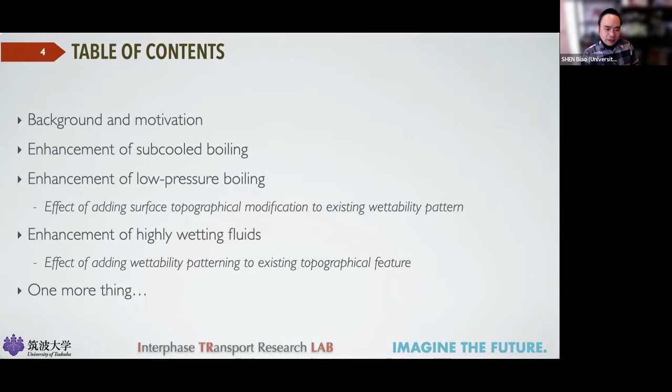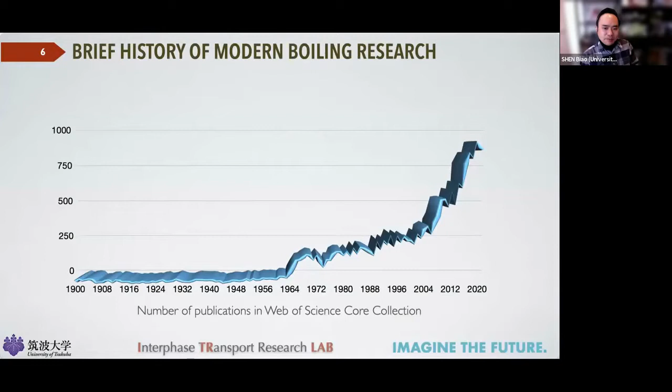So let's first go back in time. Here's a plot of the number of boiling related publications versus time in the Web of Science Core Collection.

In almost every textbook on heat transfer, the beginning of boiling heat transfer research is attributed to Nukiyama's description of the boiling curve in 1934.

Here I want to dig a little bit deeper. I don't know how many of you have actually read the original paper by Nukiyama, which is actually a terrific read. It was written in a very, very old-fashioned style, and for better or for worse, not so many people write papers like that anymore.

After reading the paper, I learned a couple of things. First, Nukiyama didn't measure the whole boiling curve, because he couldn't control the surface temperature, the part about transition boiling was actually missing from his data.

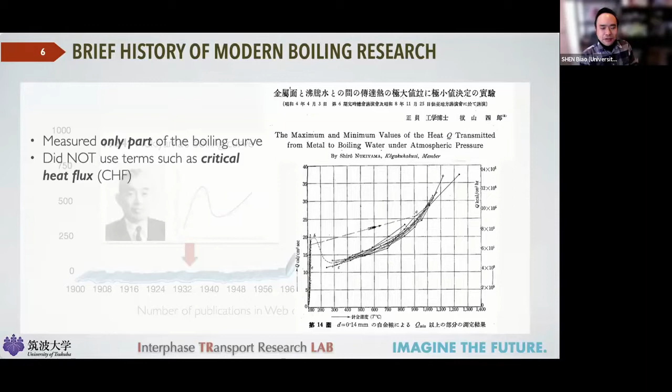Second, he never used the term critical heat flux in his paper, which makes me wonder who actually coined the term critical heat flux. If you know the answer, please let me know.

Thirdly, he's very honest about the limitations of his experimental setup. A big chunk of the paper was actually devoted to uncertainty analysis.

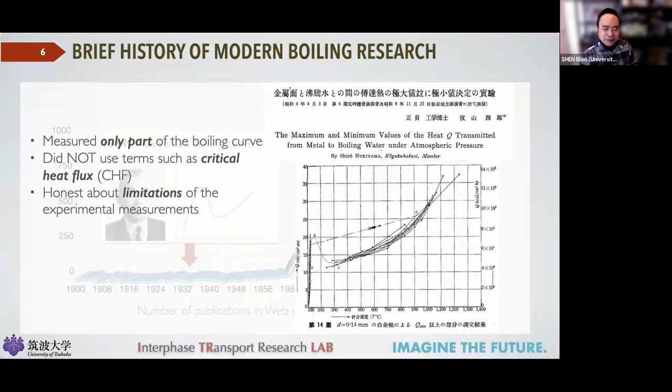And right out of the gate, he acknowledged the impossible task of theorizing boiling phenomena. He wrote, I quote, 'As the boiling phenomenon is so involved and complicated, the analysis of boiling heat transfer is almost an impossible problem.'

And finally, he cited only 5 papers. So I guess you know you're the pioneer of any field if your paper only contained 5 references.

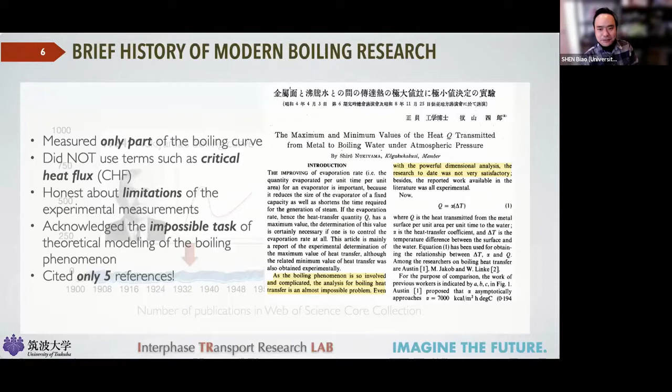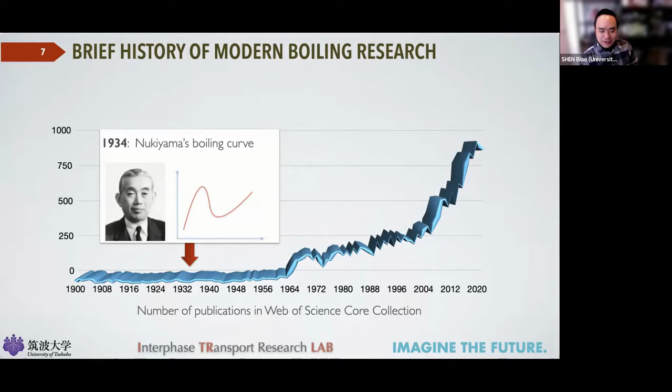So after the groundbreaking work by Nukiyama in the 1940s and 50s, nothing actually happened. That is, until another groundbreaking work came onto the stage, and that is Zuber's hydrodynamic interpretation of the boiling phenomenon. That really elevated boiling from an engineering curiosity to a serious scientific topic, putting boiling on the map, so to speak.

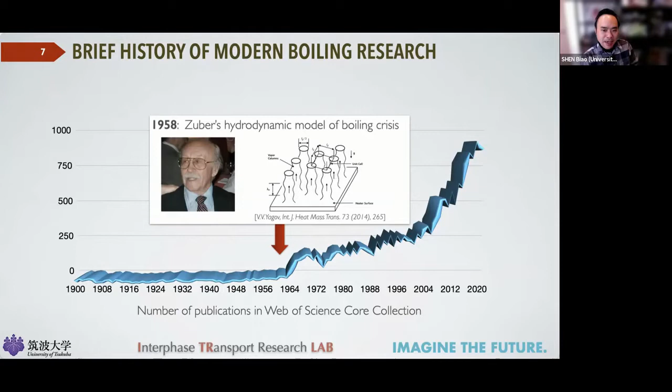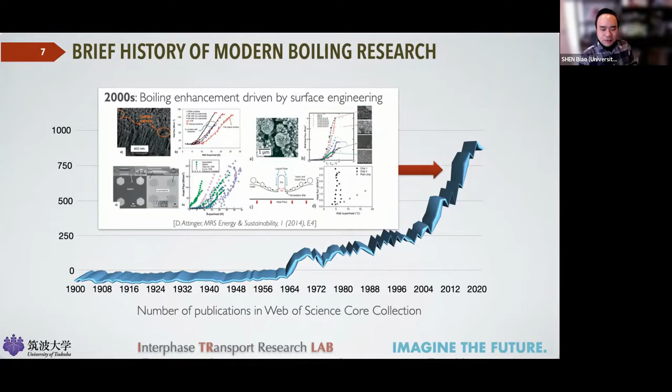And around the turn of the century, the world has seen another wave, or another golden age, for boiling research. This time it was not driven by any particular theoretical work, but by a sudden proliferation of all kinds of tools at our disposal to directly manipulate and control surface properties. There is now a global contest to see who can come up with a boiling surface that can have the highest CHF, lowest ONB, and can last forever. My work is pretty much part of that effort.

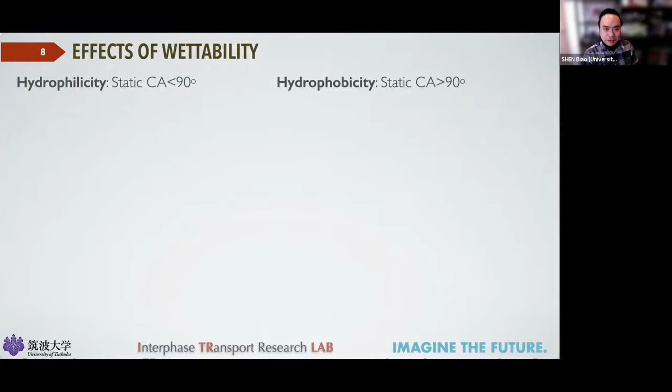Here, the surface is actually a titanium dioxide surface under ultraviolet irradiation. So the incoming photon can knock off an oxygen atom from the surface, thus creating a vacancy in the surface that can help the surface bond with water or hydrogen atoms in this case.

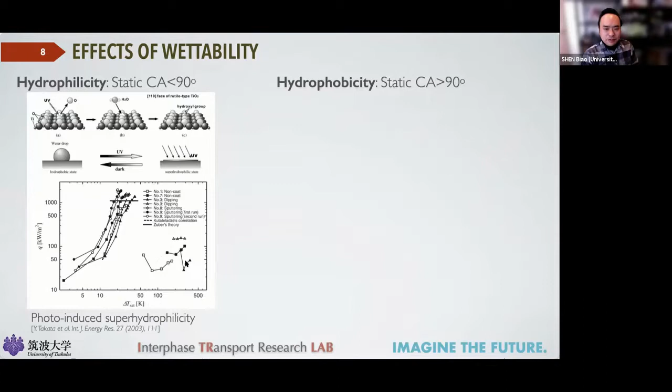So the surface has a very high CHF and also a minimum heat flux, MHF. And that means the surface works very well in the high heat flux region.

At the opposite end of the spectrum, you would have a hydrophobic surface. Here's an example - I think this is a copper surface electroplated with a very thin layer of suspended PTFE particles. The surface has a very high contact angle, maybe reaching 140 degrees, but it has some durability issues, though that's another story.

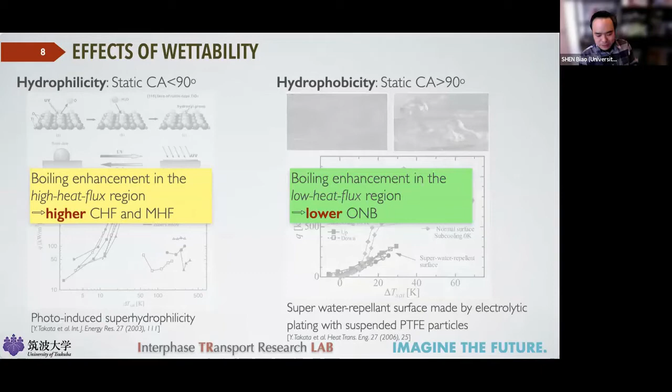The surface has a very low onset nucleate boiling, but once boiling started on such a surface, it soon turned into a very thin vapor layer, which makes the surface pretty much useless for any heat transfer application. But not all hope is lost when it comes to hydrophobic coating.

When combined with a hydrophilic substrate, it can work pretty well, and the end result is what we call a biphilic surface. It's a surface with an alternating pattern of hydrophobicity and hydrophilicity.

As you can see here, you can have heat transfer enhancement from ONB all the way to CHF. More interestingly, you can have very ordered bubble nucleation and growth on the surface. The bubbles tend to form on the hydrophobic part of the surface, but their expansion will be limited by the surrounding hydrophilic area.

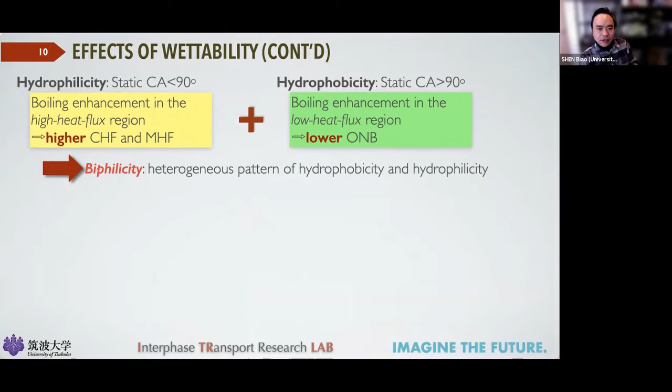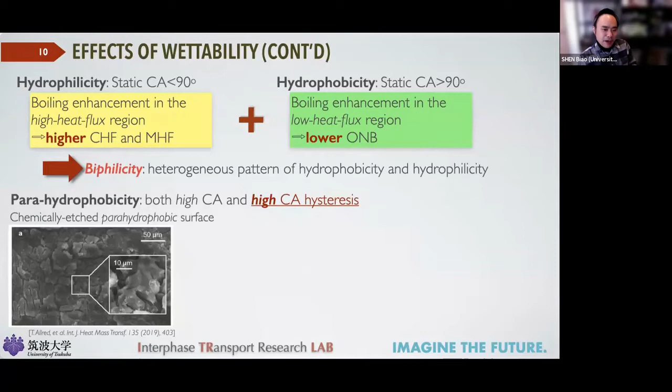It would be remiss on my part not to mention this new concept, parahydrophobicity, which entails both high contact angle and high contact angle hysteresis. Here's an example of a parahydrophobic surface, and it mimics a rose petal instead of a lotus leaf. Boiling on such a surface tends to have both low ONB and high CHF.

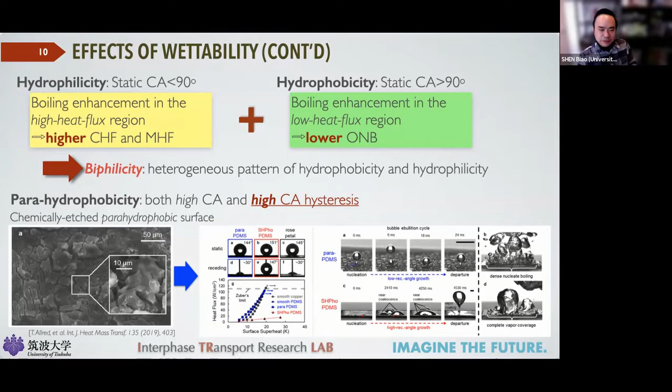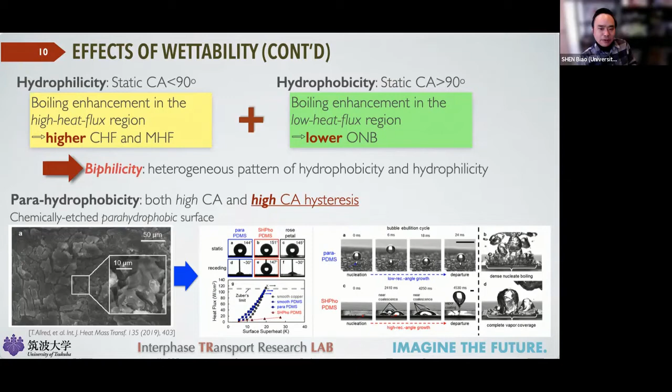If you pay attention to how bubbles grow on such a surface, as you can see here, the footprint of the bubble tends to be very small, meaning its expansion on the surface has been greatly hindered, which makes it work in a very similar way to a biphilic surface. So I guess the key here is trying to come up with ways to directly control contact line dynamics on the surface.

All right, let's start with the case of enhancement of subcooled boiling. This is the first project I did since joining the University of Tsukuba.

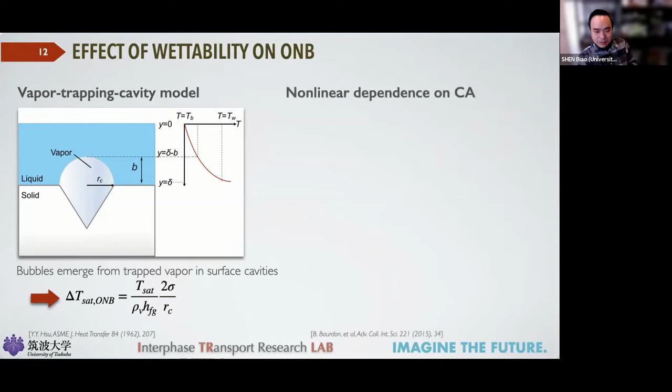And apparently that is not the case. We have direct experimental data showing a very strong nonlinear dependence of ONB superheat on surface contact angle. The surface used in this study is an ultra-smooth glass substrate and grafted and coated with self-assembled monolayers of different wettability.

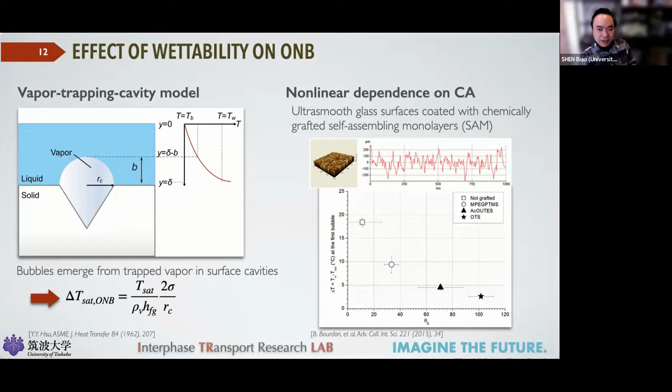So you can almost remove surface roughness as a parameter and focus on the surface contact angle. As you can see here, as the contact angle increases, you tend to have very low onset nucleate boiling superheat. But the question is, how low?

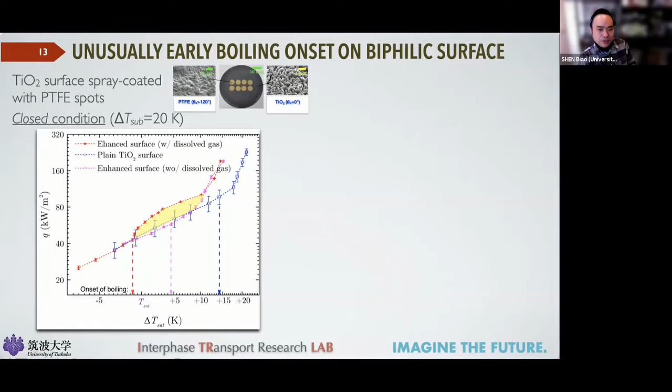And that is not the most interesting part. What is interesting about this research is that none of this behavior can occur with a homogeneous copper surface.

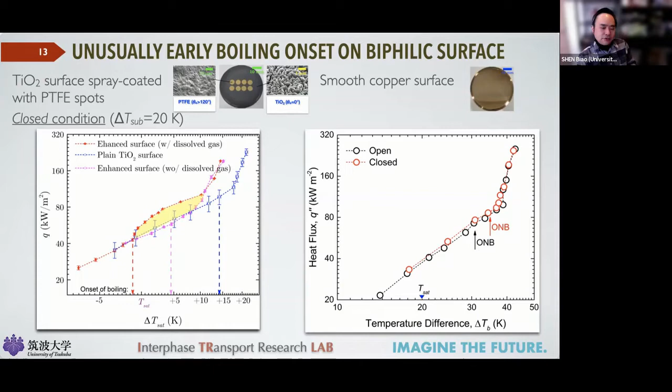As you can see here, with the same experimental procedure and setup, you don't see this kind of dramatic change in the boiling curve. And that means the hydrophobic part of the surface has this unusually strong affinity for vapor or gas.

We ran some diffuse interface simulation using a water-nitrogen system and observed pretty much the same behavior. That is, you tend to have bubble departure from the surface only if you also have a high concentration of dissolved gas in the liquid phase.

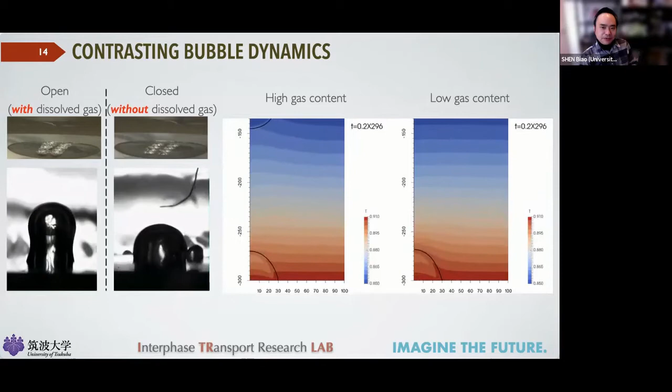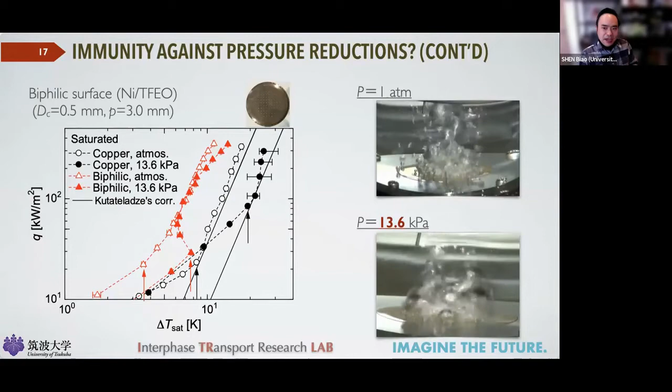Then we tried the same experiment with a copper surface, I think coated with nickel TFEO, maybe particles in this case. The results show a very dramatic difference. The boiling curve is almost immune to the pressure change. As you can see here, most of the nucleation sites remain active even under such a low pressure.

But like any good story where there's always a plot twist at the end, the pressure resistance of the biphilic boiling surface, I can only say, was too good to be true. It was later found that when the pressure is further reduced, a sudden transition to this kind of intermittent boiling mode also occurred on the biphilic surface. So we have to modify our conclusion a little bit, to reflect that the transition to intermittent boiling was only effectively delayed, but not eliminated, on the biphilic surface.

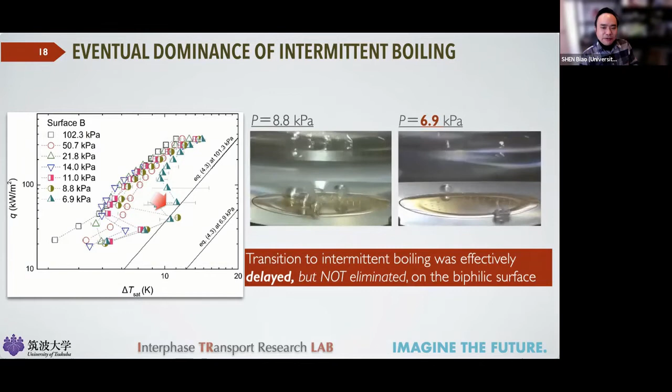To solve this problem, we need to figure out exactly how that transition happened. And that is exactly what we did: we tried to gather more data on bubble dynamics from a single hydrophobic spot.

The first thing we noticed is that at high pressure, you can always have vapor residual left on the surface after bubble departure. It's easy to imagine that for that to happen, the contact line has to be affixed to the surface in the final moments leading up to bubble departure, so the rupture of the bubble interface happens in the middle of the bubble instead of at the bottom.

This remaining vapor on the surface is critical, because from these residual vapors you can start the next cycle of bubble growth without any delay, and that's very good for heat transfer applications. By comparison, at low pressure, the amount of vapor residuals tends to be significantly less, and from time to time you have these clean bubble departures from the surface, which didn't happen at high pressures.

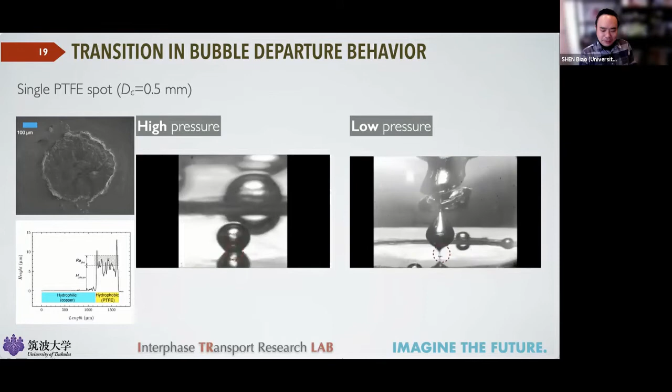Without vapor residuals on the surface, in order to start the next ebullition cycle, you have to wait maybe seconds, like in this case. That's how the intermittent boiling mode starts to take over even on the biphilic surface. Now we have these experimental observations, the next step is to figure out exactly what happened.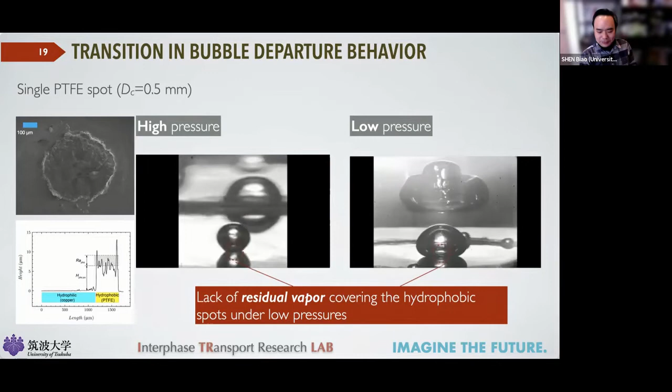As I mentioned before, the existence of bubble residue on the surface has a lot to do with how the contact line moves in the final moments leading up to bubble departure. In the case of low pressure, our hypothesis is that the contact line somehow depinned from its original position on the surface, and that causes this disappearance of bubble residue from the surface.

It turns out the way the contact line moves on the surface is not a trivial matter. It has a subtle but significant impact on bubble departure itself.

On the left, you have experimental data on bubble departure diameter as a function of pressure. Let's consider a scenario where the contact line remains fixed, or pinned, on the surface. The bubble departure will depend on the force balance between the buoyancy force and the resisting surface tension force. Here is a simple prediction coming out of that model, and as you can see, the prediction is almost independent of pressure change.

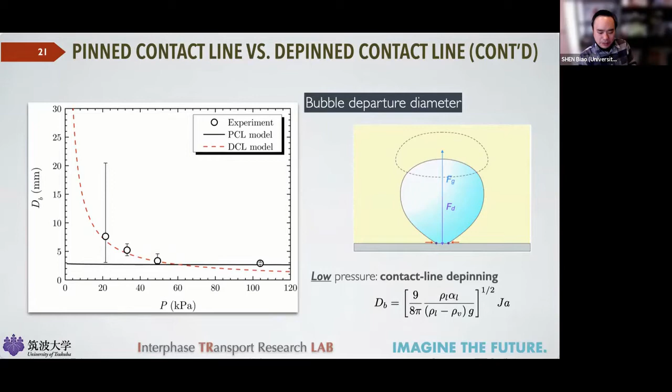Let's consider a second scenario where the contact line is allowed to move in the moments leading up to bubble departure, meaning the bubble base is always shrinking. In that case, the bubble departure depends on the force balance between the buoyancy force and the viscous drag force, giving a very different prediction for bubble departure size, strongly dependent on pressure. The transition between the pinned contact line model and the depinned contact line model captures the transition of bubble departure diameter we actually measured in our experiment.

That begs another pesky question: what actually triggers bubble motion? What actually triggers contact line motion on the surface? The answer is surprisingly simple and straightforward. It has to do with how fast the bubble expands on the surface.

So we ran some simulations to compare the cases with fast bubble growth and slow bubble growth. As you can see, in the case of faster bubble growth, the contact line is not responding to the changing surface wettability. But in the case of slow bubble expansion, you have a pinned contact line throughout the bubble growth process.

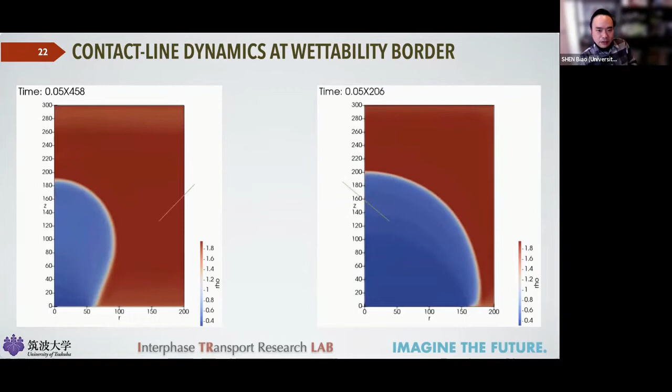The same kind of behavior we also observed in experiment. Here's the experimentally obtained bubble growth data. As you can see, in the case of depinning contact line, you have significantly faster bubble growth. So I would not say there's a direct causation, but there's definitely some kind of strong correlation between the contact line dynamics and bubble growth dynamics.

Knowing how contact line depinning happens gives us some new ideas about how to prevent it from happening. Here's a plot of bubble departure diameter as a function of pressure. Just as before, there is a clear transition from the pinned contact line mode to the unpinned, depinning contact line mode when the pressure decreases to a very low level.

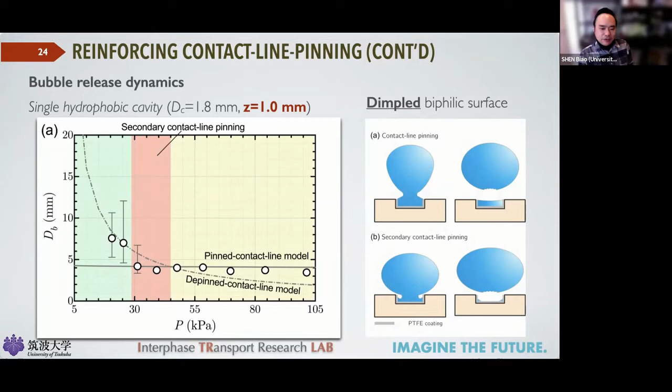Next, we modified the surface to add dimple cavities on top of the underlying biphilicity pattern, so as to raise the energy cost of contact line depinning. Compared with the flat biphilic surface, there is definitely a secondary contact line pinning effect happening. Apparently, with the presence of the cavity on the new surface, a depinning contact line would have a second chance to get reattached to the surface as it recedes deep into the cavity. Such extended pressure range for the pinned contact line mode, I have to say, is only marginal.

That was confirmed by the heat transfer measurement. As you can see, with the dimple biphilicity surface, the heat transfer coefficient shows significant heat enhancement for pressure levels down to about 9.5 kilopascal. If the pressure goes any further, there is almost no effect, even with the dimple biphilicity surface.

But I will argue this surface enhancement is in the right direction. So the concept might work even better with more elaborate surface structure design, such as re-entrant type cavities.

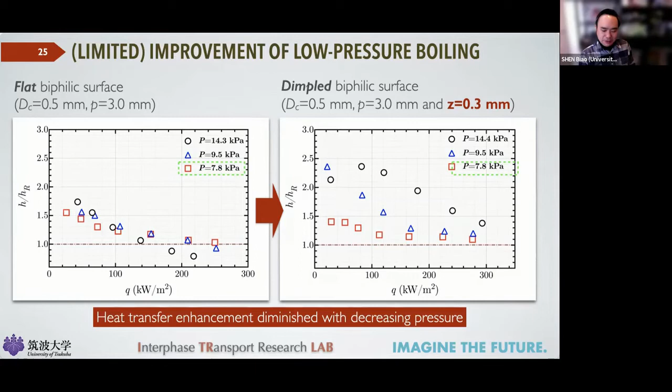The last topic I want to cover has to do with the boiling of fluids other than water, especially low surface tension liquids. As I mentioned before, in the past two decades or so, we have seen progress by leaps and bounds when it comes to surface engineering. Now we have all kinds of enhanced surface designs for boiling of refrigerants.

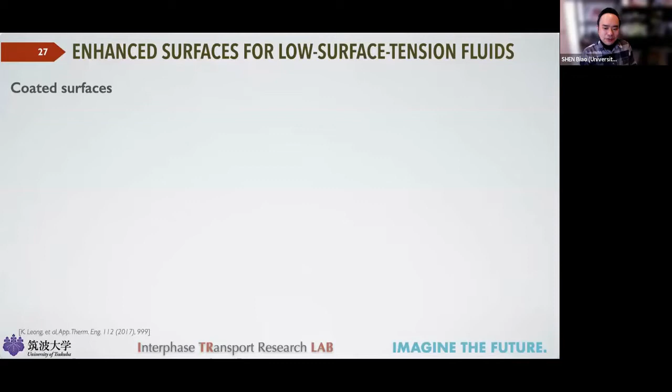These surface designs include coated surfaces, where the enhanced surface structure is coated onto a substrate made of different material. Examples include spray coating of polymer nanofibers and sinter coating of copper microparticles. Opposite such coated surfaces, you have intrinsic surfaces, just like the name entails, where the enhanced surface structures are directly grown onto the substrate, which leads to zero thermal contact resistance and a better bond between the coating layer and the substrate.

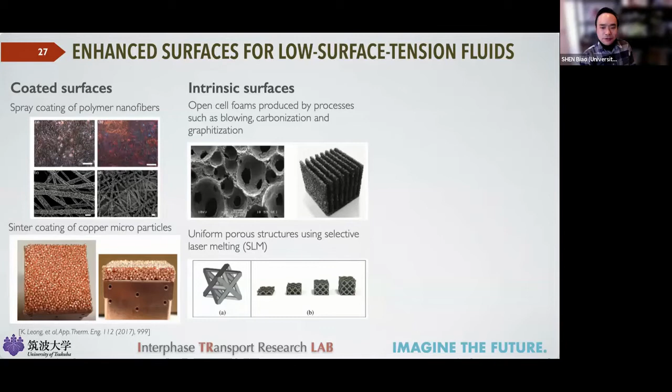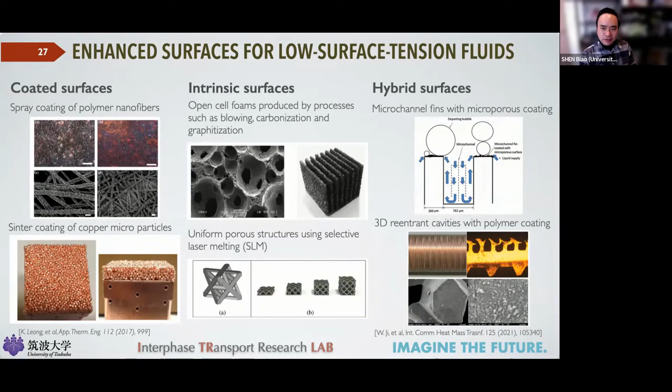Examples include open cell foams produced by carbonization, graphitization, and blowing. With additive manufacturing techniques such as selective laser melting, you can fabricate even very complicated three-dimensional structures such as octet-truss unit cells. And of course, you can combine these two techniques to make hybrid surfaces, such as microchannel fins with microporous coating, or three-dimensional re-entrant type cavities coated with polymer coatings.

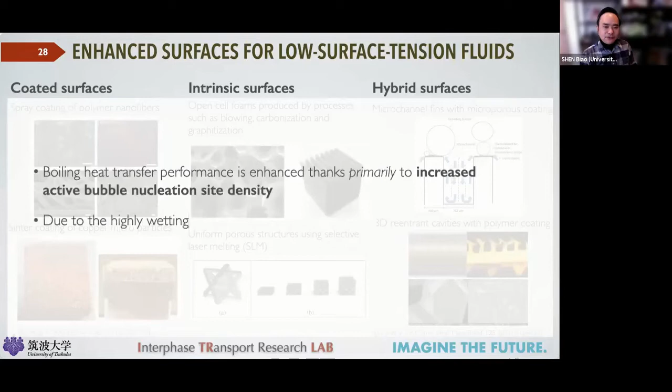There is a common thread connecting all these surfaces, and that is increased surface porosity. The resulting proliferation of active nucleation sites is believed to be the major driver for the enhancement of boiling heat transfer. By comparison, there have been very few studies devoted to boiling heat transfer enhancement using surface wettability.

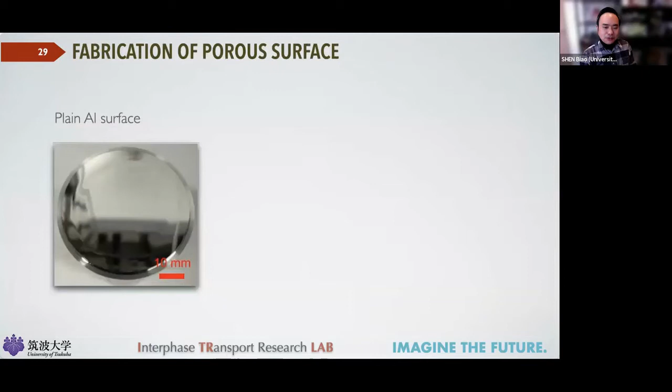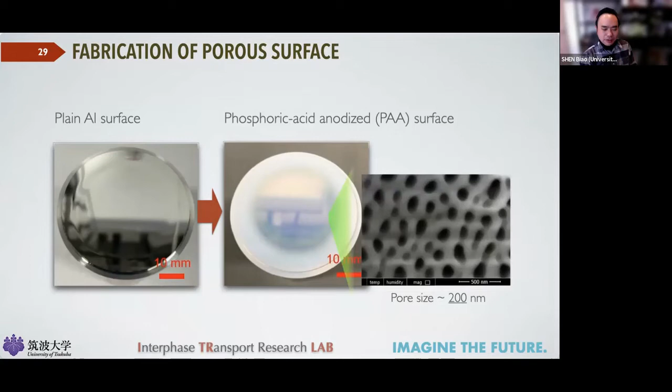In this work, we start with a porous coated surface. Specifically, a thin, highly porous alumina layer was grown onto a plain aluminum surface using phosphoric acid anodization. We call this surface a PAA surface, and it has an average pore size of about 0.2 microns, or 200 nanometers. We ran a boiling test, an ethanol boiling experiment to be specific, on such a surface.

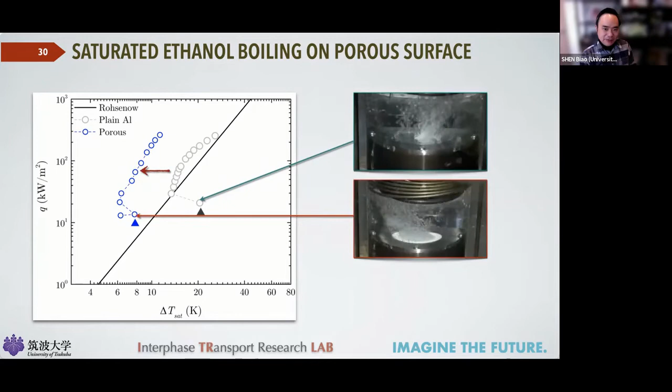The results show significant heat transfer enhancement with the porous surface, and it is very easy to see why: on the porous surface, you simply have more bubbles being generated.

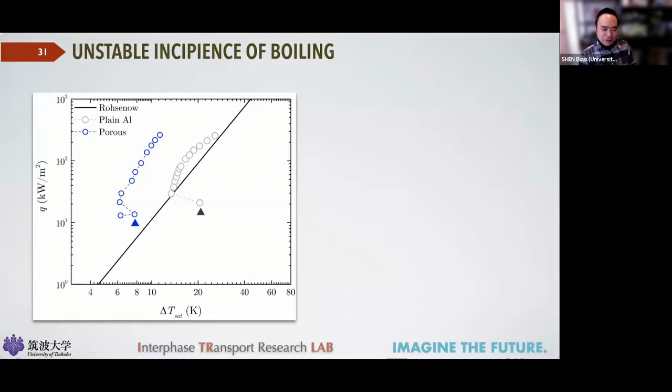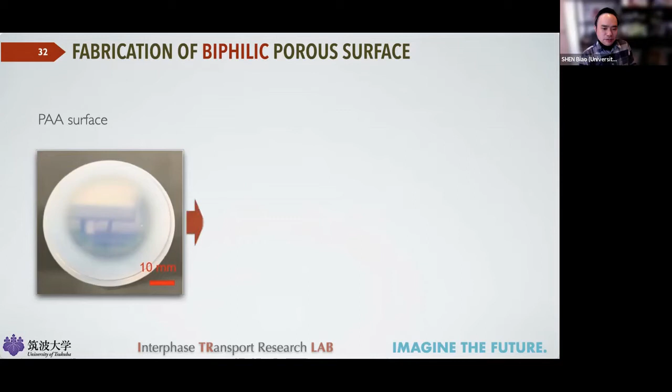Next comes our hybrid approach, adding wettability engineering on top of porous texture surfaces. We use a polymeric coating with a very long and quite honestly intimidating chemical name to create a biphilic pattern on the surface. Now the PAA surface is partially hydrophobic, even against highly wetting ethanol.

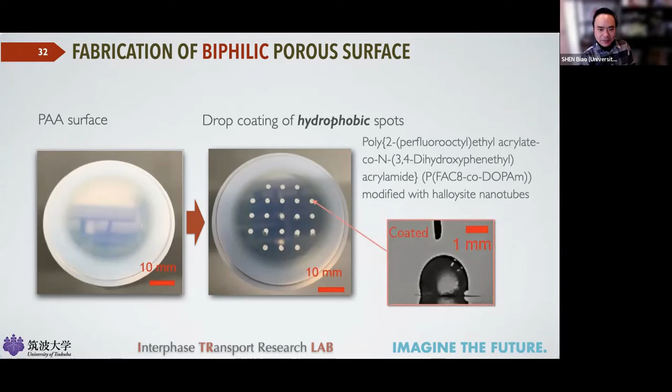We ran the same set of dry and wet experiments on the biphilic microporous surface. The results show that even when the surface is supposedly fully wetted, you still have a very low onset of nucleate boiling compared to the uncoated microporous surface—an 80% reduction in terms of ONB superheat.

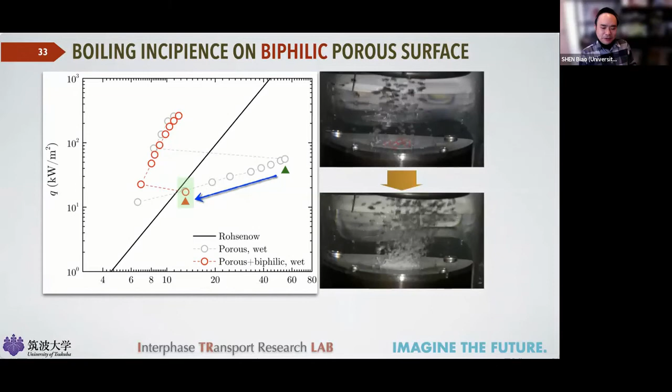We have some tantalizing clues as to how this happens. As you can see here, bubbles first appear on the hydrophobic spots on the surface, and they work like a fuse, lighting up the surface pretty fast. If you increase the surface heat flux just a little bit, almost all of the nucleation sites will suddenly come into life, becoming activated.

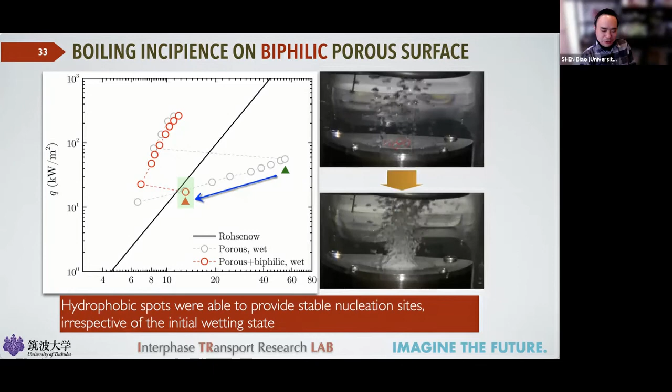So the hydrophobic spots were able to provide stable nucleation sites, almost irrespective of the initial wetting state. We have developed some theory as to how this can happen. Our hypothesis is that on the hydrophobic surface, bubble nucleation has more to do with pre-existing nanobubbles on the hydrophobic surface, but that's maybe a little beyond the scope of this presentation. If you are interested, you can check out our paper on that topic.

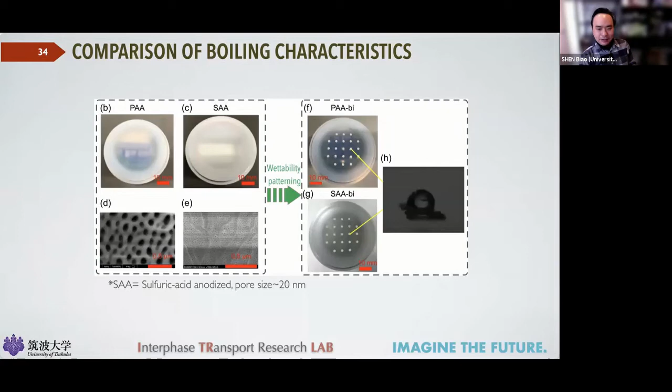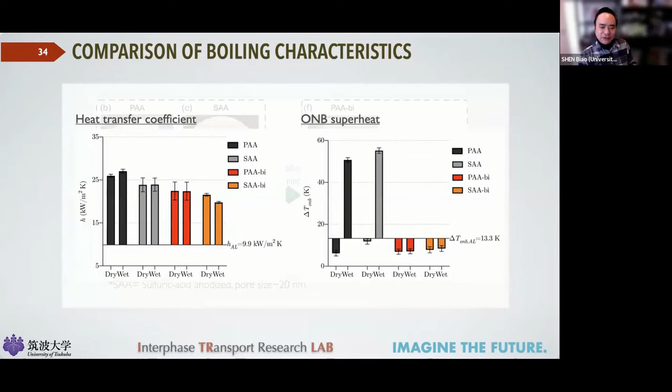So that brings us to the final part of my presentation. Here is my two cents about the current state of boiling heat transfer.

As you recall, at the beginning of my presentation, I mentioned that Nukiyama was pretty pessimistic about boiling heat transfer as a topic for theoretical modeling. But I will argue the answer to the question of whether or not it is an impossible task to come up with a theoretical model for boiling heat transfer should be a conditional no.

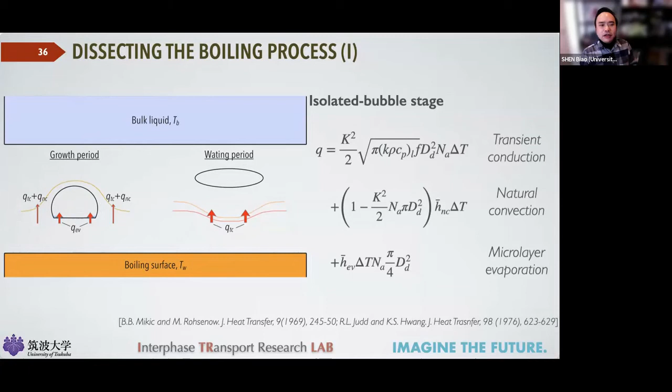As you can see, over the past 50 years we have developed many heat transfer models for boiling. In the case of the isolated bubble stage, that is the low heat flux region, you have a heat flux partition model covering heat transfer mechanisms such as transient conduction, natural convection, and of course microlayer evaporation. It works pretty well as long as you have accurate data on active bubble nucleation site density, bubble departure frequency, and diameter.

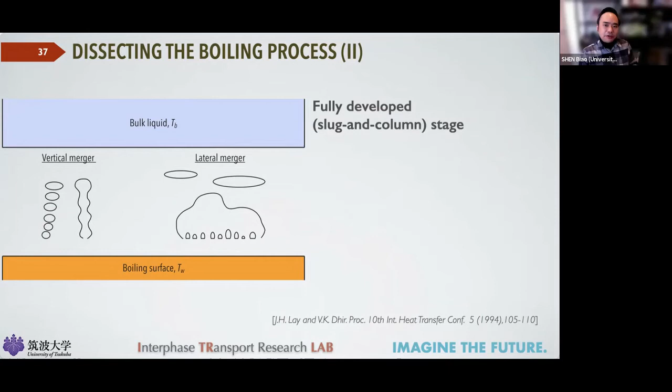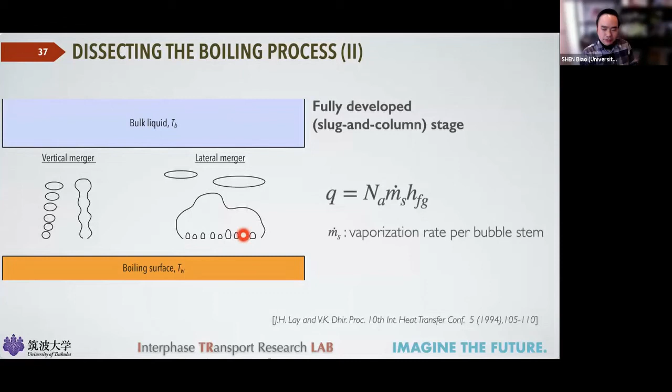And in the case of the fully developed stage, you have complicating factors like vertical and lateral merging bubbles. But still there is a way to describe heat transfer as long as you know exactly the vaporization rate per bubble stem, underneath these giant bubbles which tend to form on the surface.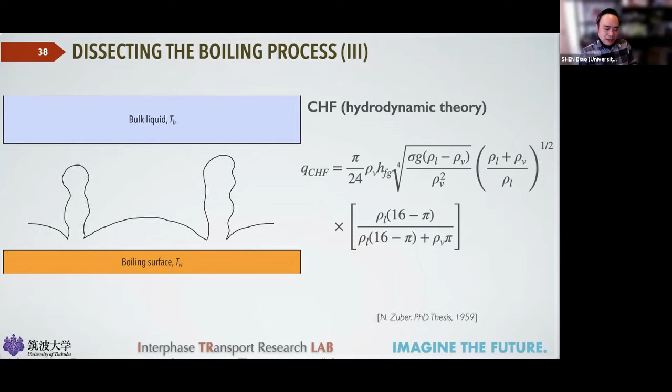And when it comes to CHF, you have, almost right from the beginning, all kinds of theory, for instance Zuber's hydrodynamic theory about CHF. In his model, CHF occurs when the released vapor reaches the critical velocity to trigger hydrodynamic instability at the vapor-liquid interface.

And Kandlikar focused instead on what happened parallel to the surface. His model nicely included the effect of surface wettability on CHF.

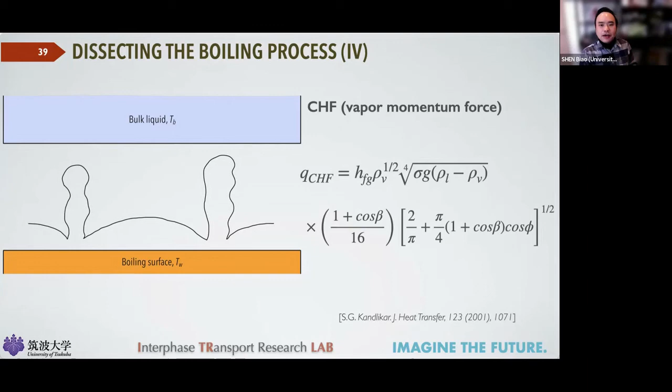And of course, Bucci's latest continuum percolation model revealed the statistical nature of CHF. So CHF coincides with the maximization of bubble cluster footprint area on the surface, which in turn has to do with the triplet critical parameters like nucleation site density, bubble growth period, and of course bubble radius.

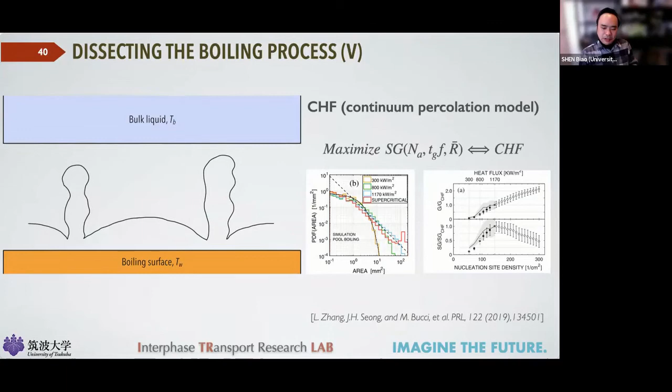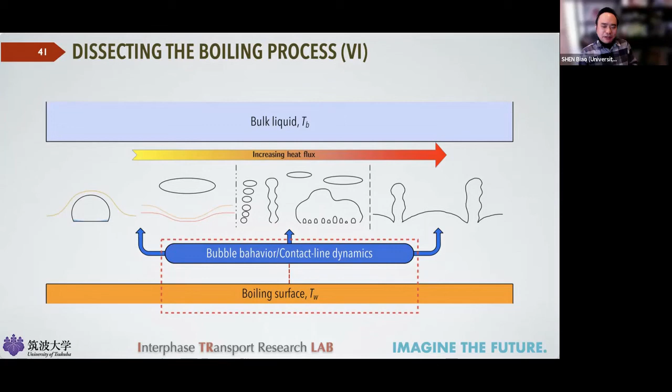So we have heat transfer models for boiling. What we don't have is this direct link between the boiling surface and the bubble behavior or contact line dynamics. In other words, we don't have a model that uses surface geometry, structure, or chemistry as inputs and outputs nucleation site density, bubble growth time, bubble release frequency, and bubble radius.

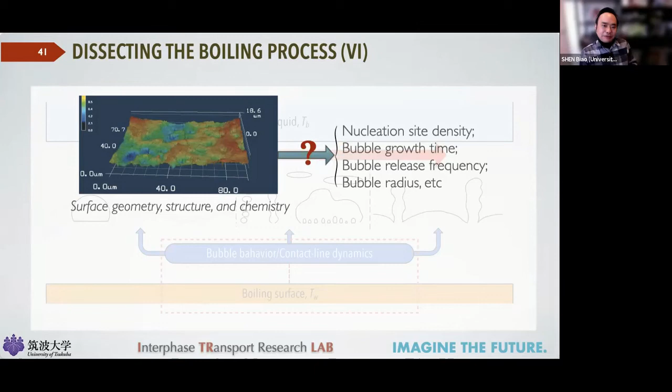And as long as we can figure out how to establish this link between surface condition and bubble behavior, I think boiling heat transfer can be solved in the near future.

As I was researching this topic, I came across a very nice essay by Lienhard, written in the 1980s. He was describing the history associated with Zuber's hydrodynamic CHF model, but I think some of the conclusions still apply today. I was particularly struck by the way he described advances or progress made in science. I quote: 'If progress occurs in science, it is by revolution and replacement, not by accretion of knowledge.'

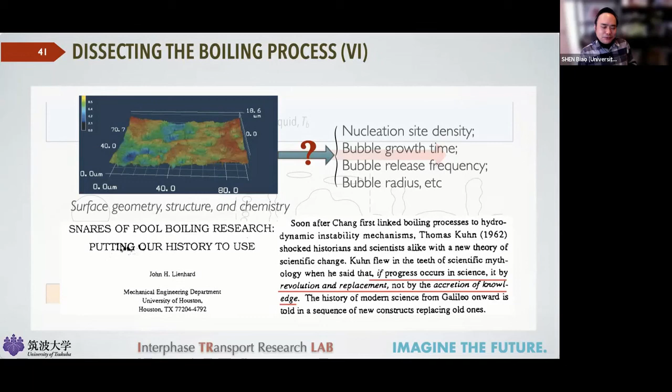So experts in any field have this tendency, knowingly or unknowingly, to resist new ideas. That is because experts know the subject too well, and they have a tendency to put too much confidence in the existing framework of research. They tend to believe that if only they had a more precise measurement, any problem can be solved. But that is usually not the case.

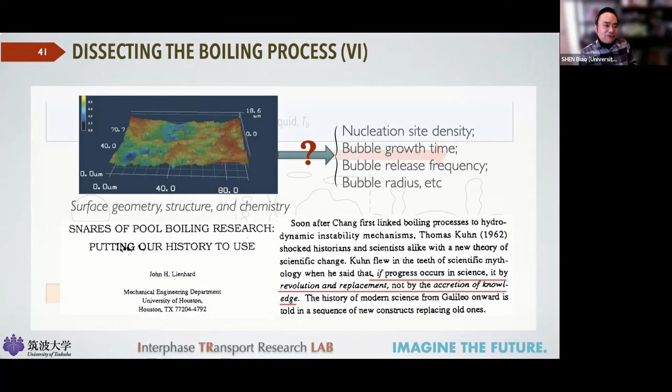In my opinion, to move boiling research to the next level, we need some new ideas. We have to borrow from other fields, for instance artificial intelligence maybe, and invent new tools for boiling heat transfer.